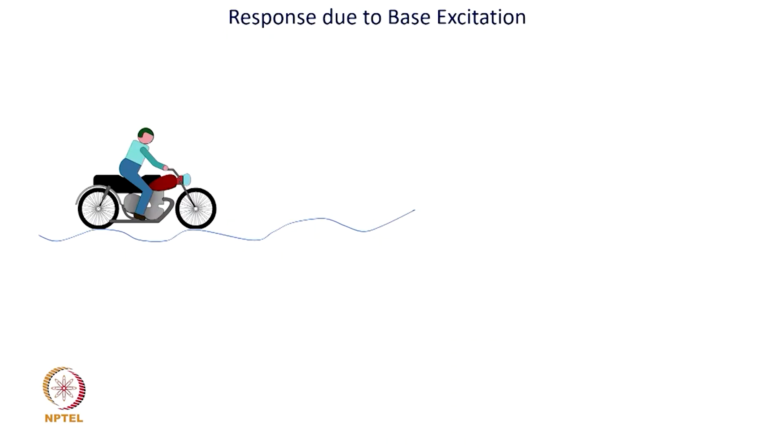Now, we turn our attention to another very interesting response phenomena. Till now what we have done is, suppose this is our vibratory system, then we said that this entire chassis of the vehicle is like a mass, and we modeled the suspension using this spring dashpot system, and maybe this engine is creating excitation force. Engine has crankshaft and the IC engine is spinning with some speed, and that is going to create excitation source for the chassis to vibrate.

So, it is like a mass sitting on some suspension on the spring dashpot system, and then if we quantify and characterize this inertia property, the stiffness property of the suspension, the damping property, and we know at what speed the crankshaft is rotating and what is the unbalance or residual unbalance in the crankshaft, primary and secondary and so on, we basically characterize the excitation force also. Then what is the ensuing vibration response felt by the rider? That is what we have done in the past. All the time this was modeled like a simplified single degree of freedom vibratory system.

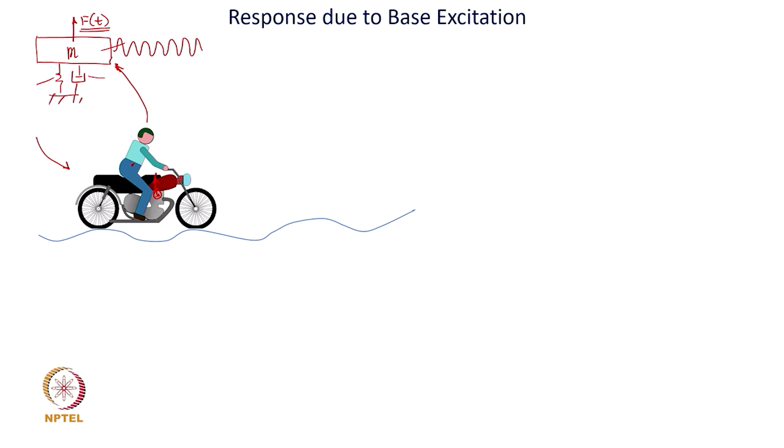Now, supposing we ignore the excitation source from the engine or from any other excitation source on the mass. We only say that this vehicle is cruising without vibration on a level road, and then it suddenly goes through a wavy road. So, the road profile here is making this kind of a motion; it is not a straight level road. If that happens, then what is the similar vibration response the chassis is going to generate? This is called base excitation, excitation coming from the base.

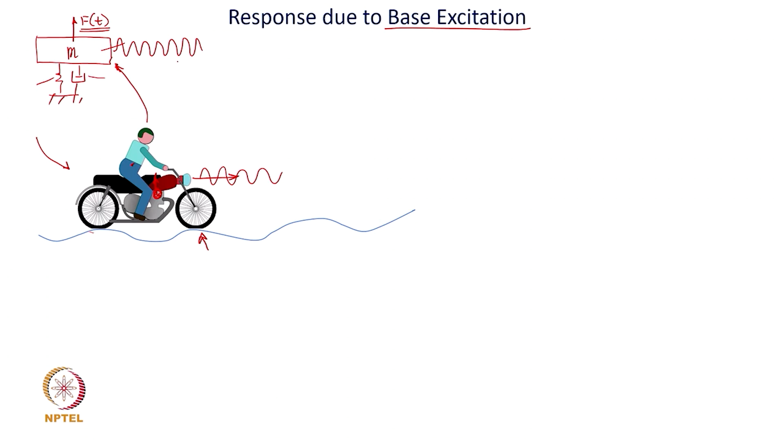For a compressor or a huge air conditioning unit, the excitation can come from the ground and it will excite that whole system. If you have a heavy forging hammer nearby, that forging hammer is going to generate excitation coming from the ground, and your other sensitive equipment or machinery can get excitation from the ground. That force somehow gets transformed into the motion of the base. Excitation due to earthquake is nothing but a base excitation to the building structure. So, what is the way we should model this system for such kind of excitation coming from base? That is the job.

So, now we can take this particular example, that you have a bike whose static deflection may be given by this value, and the road profile. Although the road profile looks a little arbitrary here, for the sake of understanding basics of response to base excitation, we assume it to be modeled like a sine wave. So, we are approximating this profile as a harmonic profile of certain amplitude, capital A, and some wavelength. With the amplitude and wavelength, the road profile is characterized as a sine wave.

So, the question being posed is at what speed the biker should not cruise his bike to avoid resonant vibrations. It is possible to realize that there would be a speed at which the rider will experience large resonant vibrations, and we shall discuss mathematically how that turns out. So, the question is to determine the speed at which the bike should not be run to avoid resonant vibrations, and this is the first part of the question.

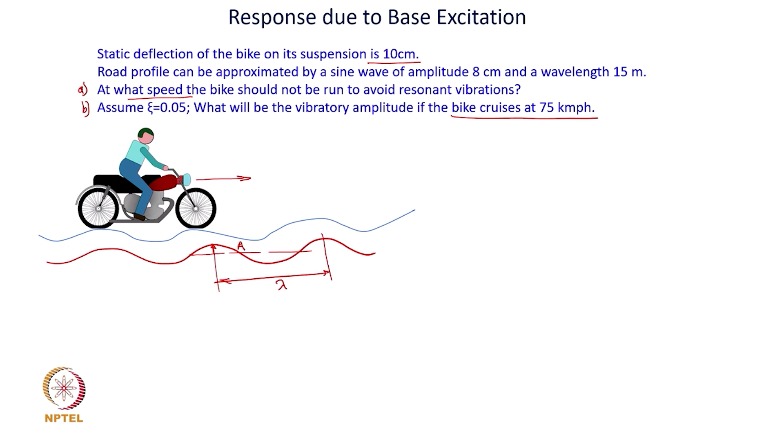The second part of the question is that if we assume the damping to be 0.05, which typically is a low level of damping we expect in suspensions, then what will be the vibratory amplitude if the cruising speed of the bike is, let us say, 75 kmph? All these questions are required to be addressed now.

Now, we do not have an expression that defines this vibratory motion. If we say that this vibratory motion will be the same as your static deflection divided by square root of (1 minus r squared) whole squared plus (2 zeta r) whole squared, will that be correct?

That is not true, because we have defined all of that with the assumption that this is subjected to harmonic excitation force. Here that is not the case. So, we will have to first figure out what is the expression that gives me the amplitude of vibration which is being asked in this particular case. Okay. So, let us get back to our normal usual vibration analysis process.

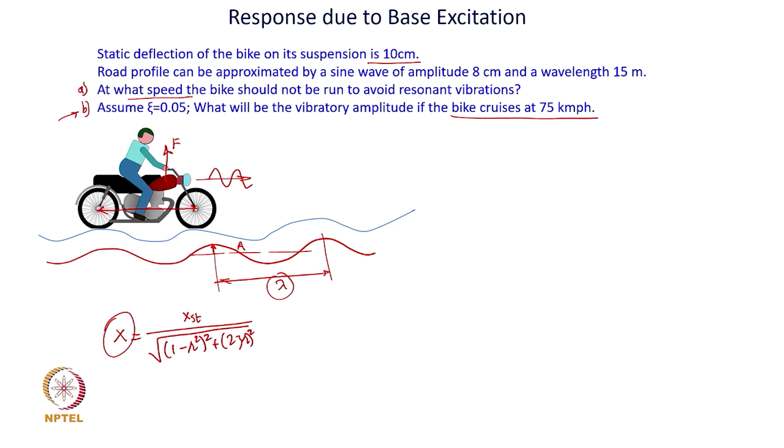What it says is, this physical system you convert it into a simplified vibratory model. Now, we assume that this wavelength is large enough compared to the distance between these two wheels. So, we model this entire system as a simple single degree of freedom system with a single mass, single stiffness and a single damping. So, this is how I will model this system, which itself can be further simplified by a simple single spring, single mass and single dashpot vibratory system.

Now, this response which we are trying to figure out, y as a function of time t, will obviously be in response to the motion x as a function of time. Okay. So, as this vehicle moves over this profile, the tire is going to be perturbed or moved up and down because of the profile of the road. This is like an excitation to this vibratory system coming from the base, that is why it is the base excitation. So, it is going to be like this or more precisely like this.

Now, if that is the case, tell me now how do you formulate the governing equations. So, very simple, this is y and this is actually x. So, if you go back to your basic vibration analysis process, the first step is already done, getting a simplified vibratory model and defining the degrees of freedom, the motion. The motion involved here is basically y of t, it is the response of the chassis.

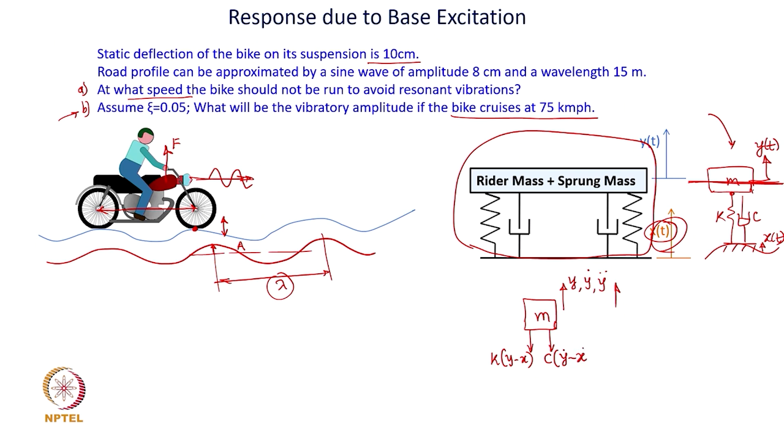What about static deflection? We are ignoring it, because we have discussed all that: once the mass is put on the spring and it deforms, your y of t is being defined with respect to the static deflected position, right. So, static deflection, mg and all that will not come into picture here as well. Okay. Now, what is the dissipating force? Similarly, that also will follow the same process. Now, you apply to get the governing equation once the free body diagram is made. Now, will it be m y double dot minus x double dot here?

Will it be m y double dot minus x double dot? So, it is the absolute y double dot that we take, right. So, the inertia is going to be proportional to its global acceleration value, y double dot. It has nothing to do with what x double dot is.

So, m y double dot is equal to summation of all the forces, and that would be what? Minus, because this force is opposite to the direction of the assumed acceleration, minus k into y minus x, minus c into y dot minus x dot.

And so, let me reorganize this expression. Now, what I have is m y double dot plus c y dot plus k y, so I have taken all y terms on the left hand side, is equal to c x dot plus k x, right.

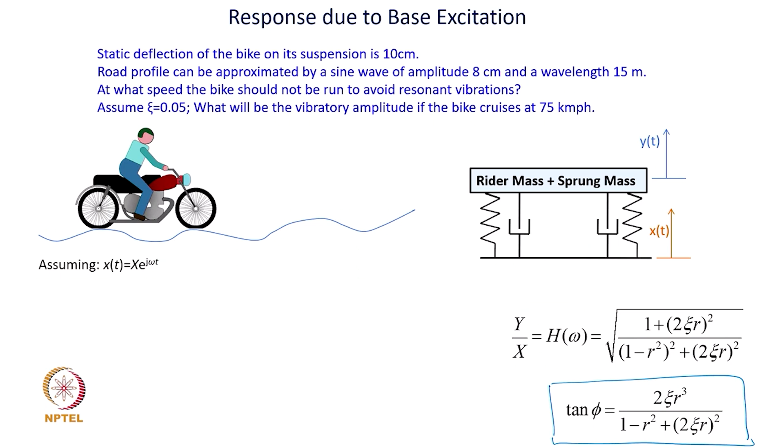So, that way one can interpret it, but the ratio of the output response of the chassis of the vehicle normalized with respect to the input motion at the base is given by this expression. And the phase between the response y and the input x is given by this expression. Those things I am leaving to you to derive yourself, because the process has been discussed many times over.

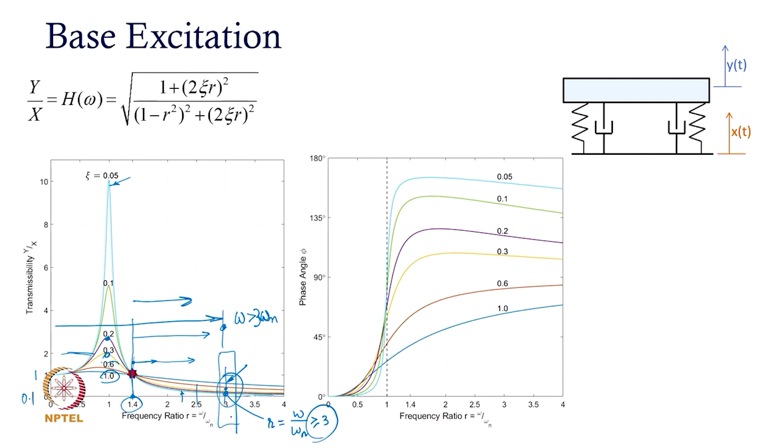I mean, it is not a sacrosanct figure as such, you can also have it 2.5, whatever is reasonably possible. Because even if mathematically it says larger is better, you do not really gain too much advantage by just continuing to increase it. There are other practical problems which we will discuss shortly.

But now what you are observing here is that the damping is not something which you should always keep on increasing just because you are going to get quieter vibrations or a lower level of vibrations at resonance. You cannot simply arbitrarily keep increasing the damping the way you want, right, because you are going to cross through this resonance within a very short period of time. You are not going to linger around the resonance region, right.

So, the passage through the resonance is usually quick, and you do not really mind slightly higher vibration for a very short period, provided that if you keep operating for long periods at your operating speed, maybe somewhere here, you expect lower amplitude to be more beneficial, and there the lower level of damping will pay off. So, this is an important aspect of base excited response that you should be mindful of.

This particular critical point, below which the amplitudes are larger than the base amplitude and beyond which the amplitudes of vibrations are attenuated, that R value is 1.4, which you can also theoretically estimate from the expressions that we have seen in the previous slide. Okay, so, this is very important. Okay, it actually is square root of 2.

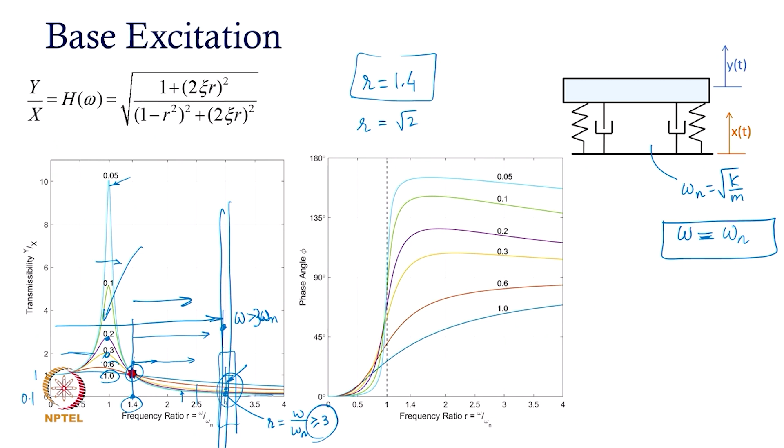So, if we want to know the speed at which the vehicle should not be run, so that there is no large amplification, we find the undamped natural frequency. And to answer your question of what omega is in this case: the static deflection of the automobile is 10 centimeters. Can we get from this the value of omega n? You all know that.

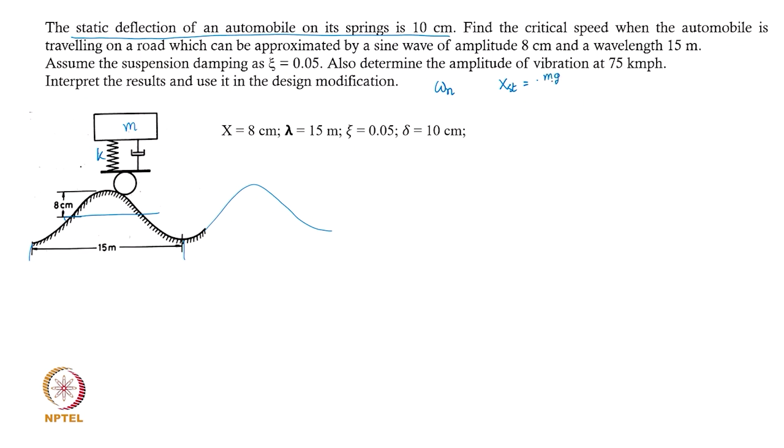So, what is static deflection? The weight divided by the stiffness of the suspension gives you the static deflection, does it not? So that basically gives me the ratio k over m in terms of static deflection and g. Because for a simple single degree of freedom system the natural frequency is obtained like this, I will simply replace k over m using the static deflection and g. That static deflection is your delta, which is given here.

So, omega n is going to be the square root of, be mindful of the units here, oh, I am sorry, g by delta. So that is g over delta, and then you have 9.81 over 0.1, and you calculate, that turns out to be 9.9 radians per second.

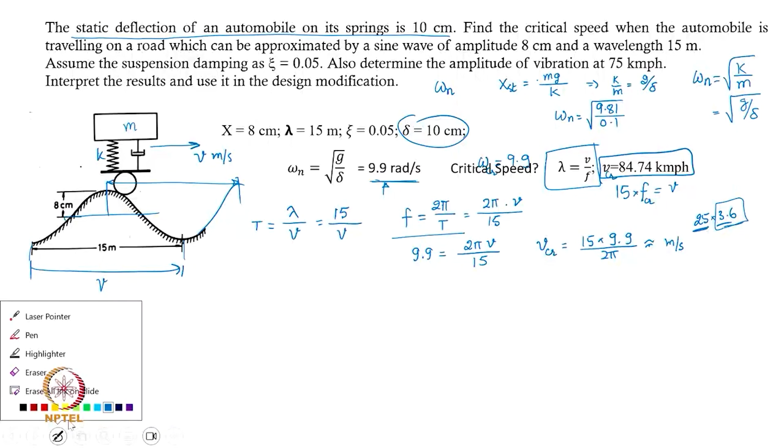Okay. So, those calculations you can do, which will give you the critical cruising speed. So, if I run this vehicle at a speed of 84.74 kilometer per hour, then there will be maximum amplification of this 8 centimeter profile. Okay. So, that basically becomes my critical cruising speed at which I should not run the system.

And are you clear now what is omega in this case? That omega is going to come from your lambda and of course, your cruising speed V. So, if you have a very low cruising speed, this motion is going to be followed at a very low frequency, and if you traverse that profile very fast, then the wheel is going to move back and forth very fast. That is how omega is indirectly linked to the wavelength and the cruising speed V.

Okay. Now, the last part is how do I find the amplitude of vibration at 75 kmph. Now, I can also get this 75 kmph converted into omega. How do I do that? Omega will be 2 pi over capital T, and that capital T is going to be 15 by 75 converted into meter per second, will it not? That is the denominator.

So, what this actually is 1 over f, which is going to be lambda over v. So, cruising speed 75 kmph divided by 3.6 will give you meter per second, and that 2 pi by capital T is going to be my omega at 75 kmph. Now, that I can get and it turns out that it is 8.72 radians per second. Clear?

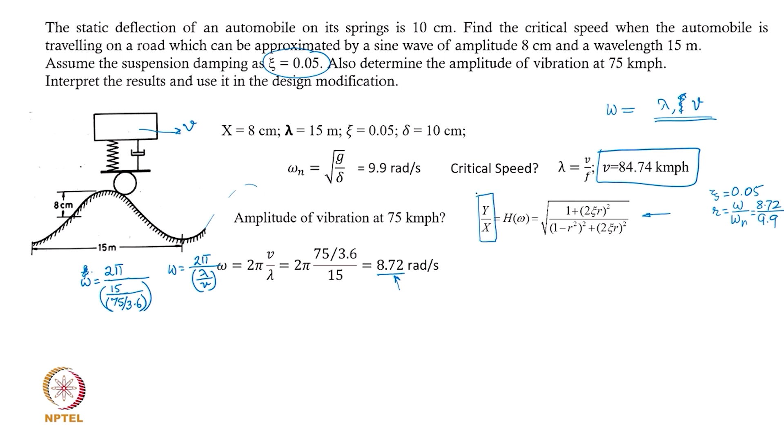So, here r is 0.88, which means that I am operating somewhere here, below critical, which means that I expect amplification. And what will be the value of that amplification? For a damping ratio of 0.05, I am basically somewhere here, roughly there. It is difficult to see from that graph, but when I actually calculate it, it turns out that this amplitude is 33.906 centimeters.

Now, what was our capital X? This 8 centimeter amplitude is getting amplified to 33.9, which is slightly more than 4 times amplified. So, that is 4 times amplification of the base motion. Okay.

So, again this entire vibration process that we learned in the last couple of slides, starting from your physical bike system converted into a simplified vibratory model, deriving the appropriate governing equations, assuming a solution, solving it, getting this kind of an expression, and then you substitute and solve it. What you have got is the value of y. Now, you interpret it: your interpretation is that the speed at which you are operating is incorrect.

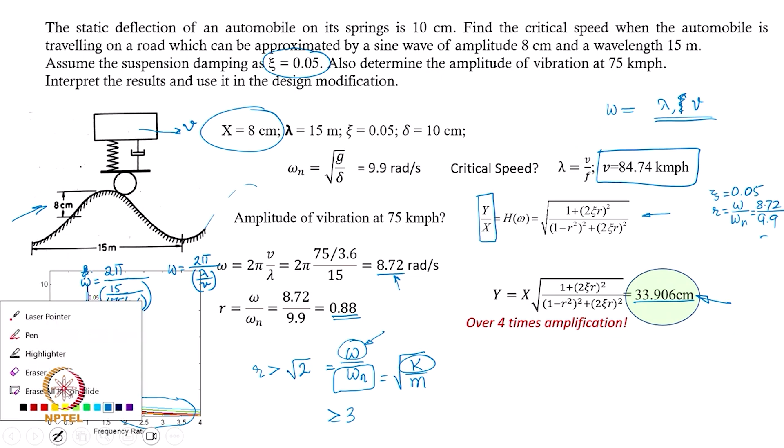Increasing the mass. Now, increasing the mass has its own problems. Increasing mass means you get a pillion rider, right. So, you are going alone and I cannot change the mass of the bike. So, one possible option is to redesign, and this is the most common and most practically viable option compared to increasing or changing mass. And so, what we are looking at here is that I would like to redesign my isolation system to change the omega n value.

Okay. So, I am basically going to change the value of omega n, and I am going to change this to, let us say, 2.72 radians per second or so, so that the ratio turns out to be now 3.2. So, I reduce the natural frequency from 9.9 radians per second to 2.72 radians per second, and then that gives me a higher value of R. So, my R is now going to change from 0.88 to 3.2.

So, I am going to now operate at the same cruising speed. I am going to work at this particular R value. If I use this R value keeping the damping coefficient same, so I am not changing the damping properties, with that I get the value of response y equal to 0.13. 260 times reduction with respect to what I was getting when I was operating in the pre-critical range, or less than square root of 2 value. That is the advantage here.

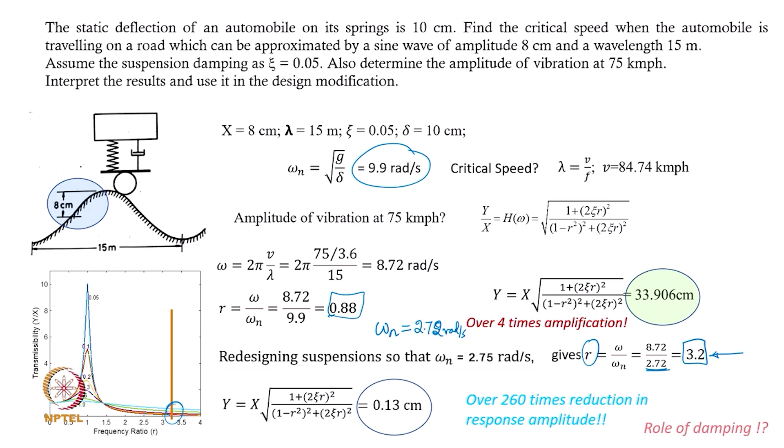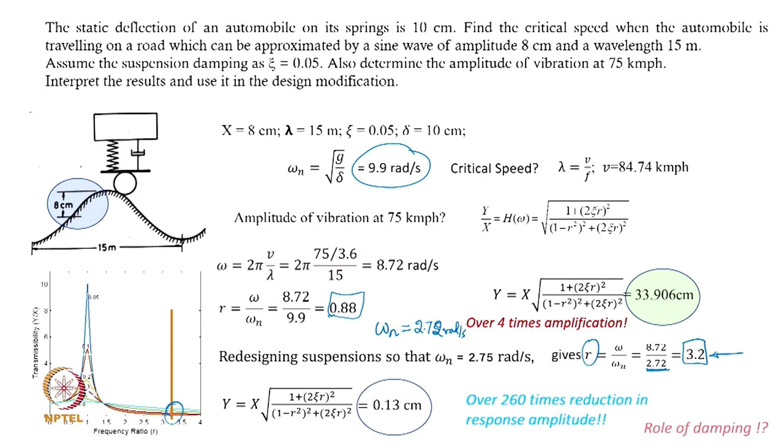Okay. And so, this is how the interpretation works: you redesign the system so that the vibration response is better. Now, role of damping here: I must not increase the damping here. I will quickly go through the resonance point, and lower damping will help me here. You just redo this exercise by increasing the damping ratio from 0.05 to, let us say, 0.3 or 2. You will find that you will not get so much of reduction.

Okay, so, in terms of transmission of the effect of vibration of any dynamic system, we had already discussed how the base excitation to the vibratory system gets transmitted to the inertial mass, and then if the transmissibility is more, then unit amplitude of base excitation gets amplified to a multi times increase in the base amplitude of the vibratory system. Okay. So, the mass vibrates with amplitude larger than the base amplitude, right.

That is what we have seen, that if the vehicle is passing over a wavy road, then the amplitude of that excitation, which is basically the amplitude of the base motion, if the vehicle is moving at a very slow speed, the mass will undergo an amplitude that will match with the profile of the base, right, or the road profile.

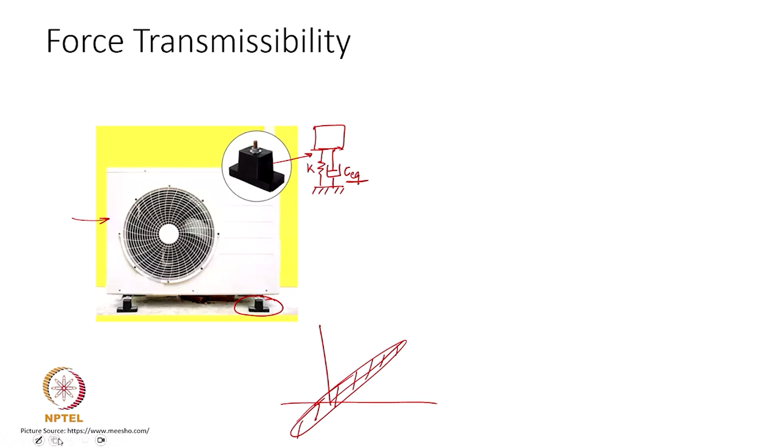coming back to what we started discussing here, if this kind of a machinery is mounted on these isolators, we can model this entire vibratory system like a mass and a spring dashpot system, the way we usually do. K and C in this case will be the equivalent of all the 4 supports as a simplified model, and single degree of freedom x of t is assumed here again. And what is there inside this condenser unit? Maybe an electric motor which will be rotating with certain speed, and may be connected to a blower which is going to rotate at certain speed.

Although you usually have maybe a single rotating shaft, it is quite common that a complex mechanical system may have multiple shafts. Okay. So, you can imagine that there could be 2 excitation forces, one due to the unbalance in this pulley of the electric motor, and in addition to that maybe this fan will have certain unbalance, right. So, you may have some amount of excitation force in the mass itself. So, what I am representing here is the excitation due to the rotating shaft or a rotating unbalance mass.

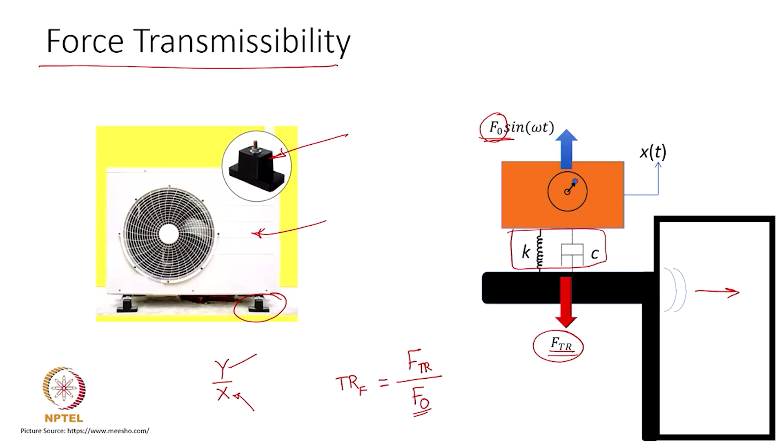So, coming back, what does this mean? This transmitted force to the source force is quite similar to y upon x, which we have already discussed as displacement transmissibility: the ratio of output displacement amplitude to base motion amplitude should be as low as possible. On similar lines, this ratio, called force transmissibility, should be as low as possible, so that for a given value of F naught, FTR, the transmitted force, is as low as possible. So, we should understand force transmissibility the way we understood displacement transmissibility.

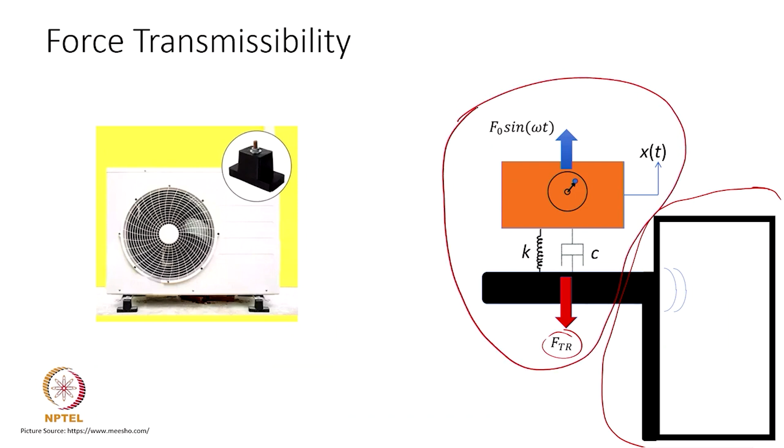What do you do now? Suppose we are required to analyze this; what happens afterwards may not be our concern at the moment. We all know what will happen if this FTR is large. So, our focus would be on this system, so that FTR is small enough.